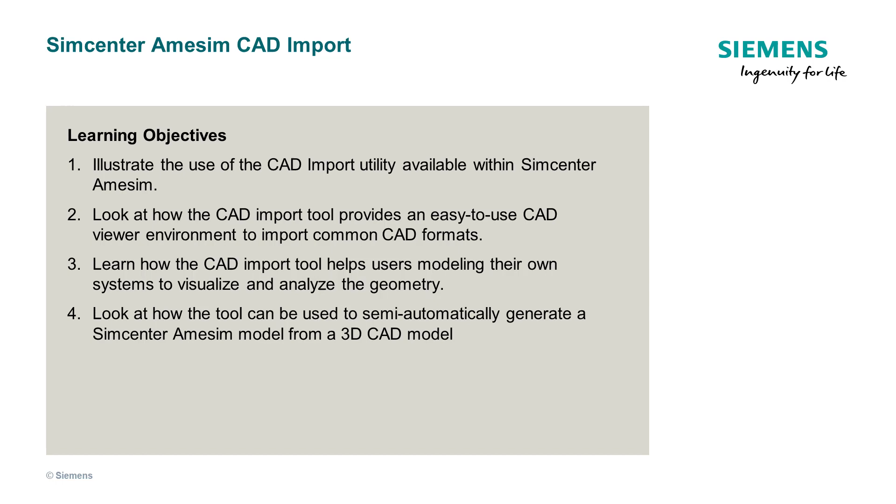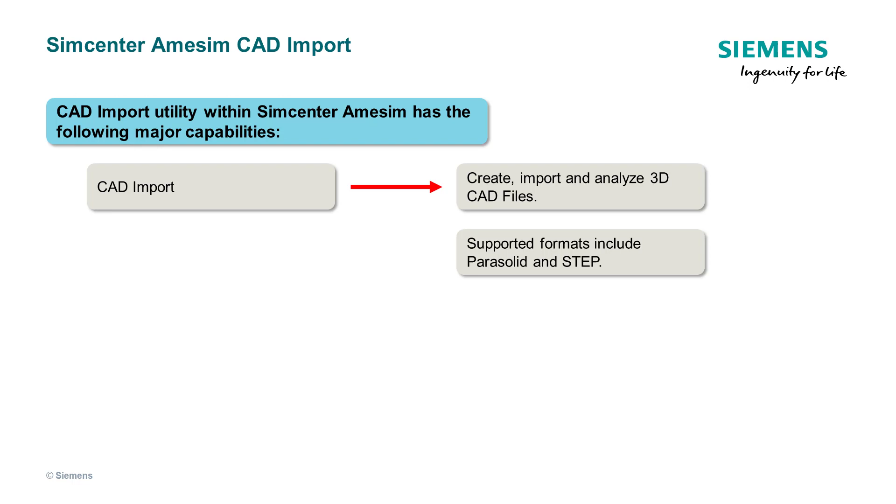We will also look at how the tool can be used to semi-automatically generate a Simcenter Amesim model from a 3D CAD model. The CAD import utility within Simcenter Amesim has the following major capabilities. First, CAD import. This is a Simcenter Amesim software integrated CAD viewer which you can use for creating, importing, and analyzing 3D CAD files without having to rely on the original CAD software application. The supported CAD formats for import include Parasolid and STEP files.

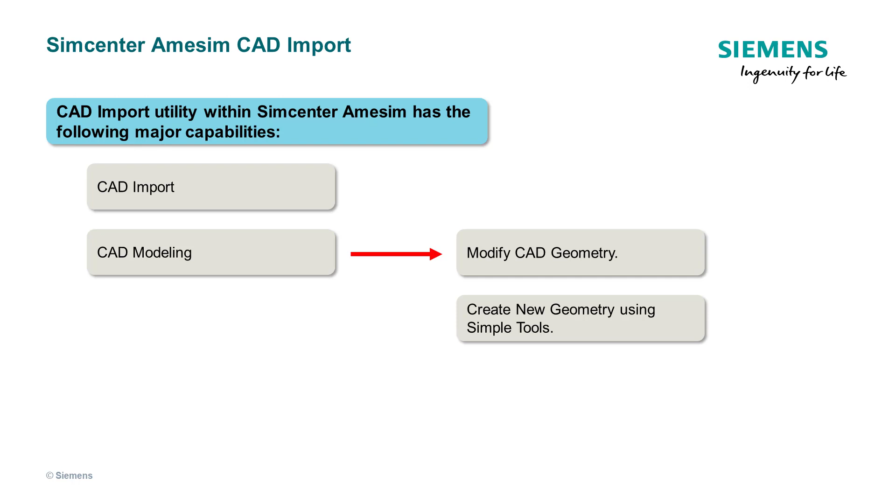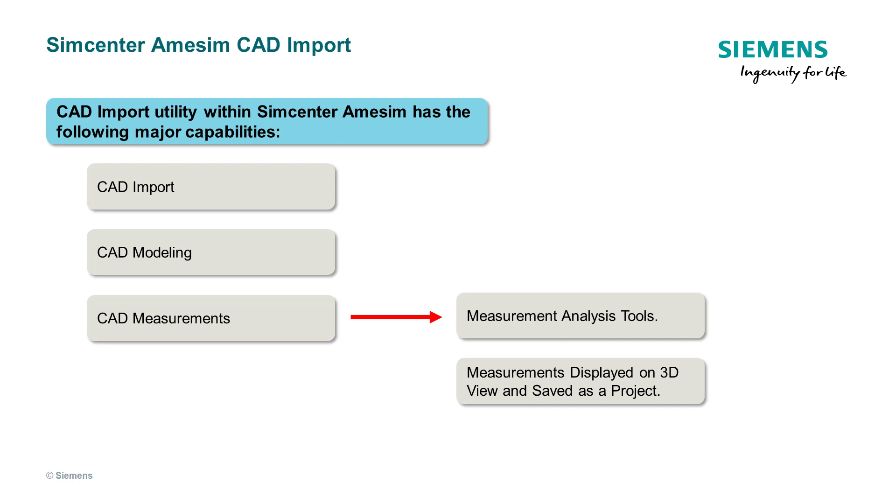Second, CAD modeling. The tool can be used for modifying geometry like filling holes, splitting bodies, etc. It is also possible to create new geometries using simple tools. A library of parametric shapes is included, and geometry can also be created from a sketch profile. Third, CAD measurements. CAD import also contains measurement analysis tools. All kinds of measurements can be displayed on the 3D view and saved as a CAD import project.

And lastly, 1D sketch generation. CAD import also provides advanced features that allow you to convert a 3D CAD model into a Simcenter Amesim 1D model. In a few steps, the 1D model is generated in the Simcenter Amesim environment and is ready to use for analysis.

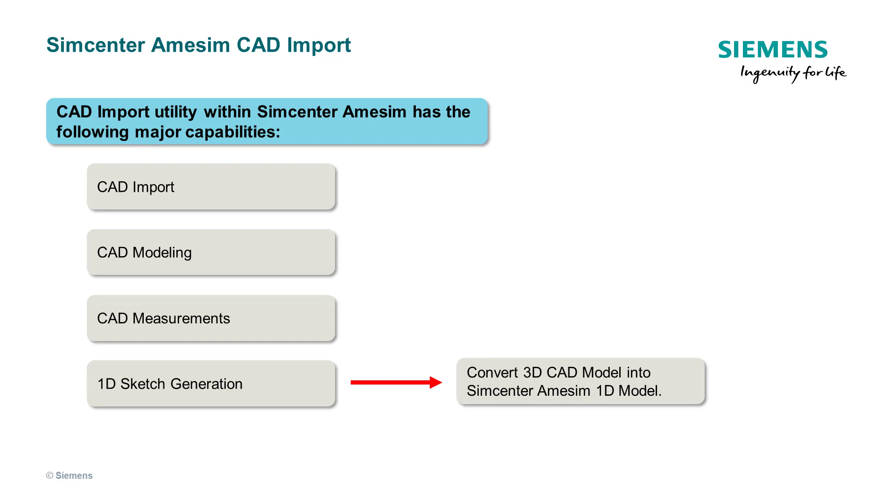Now, let's look at how to use the CAD import tool with the help of an example. We will go through each step one by one to generate a 1D sketch from a 3D CAD file. For this demonstration, we will use the 3D model of a pivoting vane pump. Before we launch the CAD import tool, we have to make sure that we have the necessary libraries loaded in the library tree. This step is important for the model to be generated. As we have a hydraulic lubrication system as an example, we will have the mechanical, hydraulic, and hydraulic component design libraries already loaded.

To launch the CAD import tool, go to Tools and select CAD import. A separate window for the tool will open. Let's quickly look at its layout. The CAD import environment has 4 panes. The object tree, which displays the structure of the object. The scene, which is the area where you visualize the 3D representation of the object.

The object inspector, which displays the properties of the selected object from the scene. It is possible to modify some properties of the object here. The measurement pane, which displays all the measurements that are performed. The type, the value, and the units of the measurement are also displayed here.

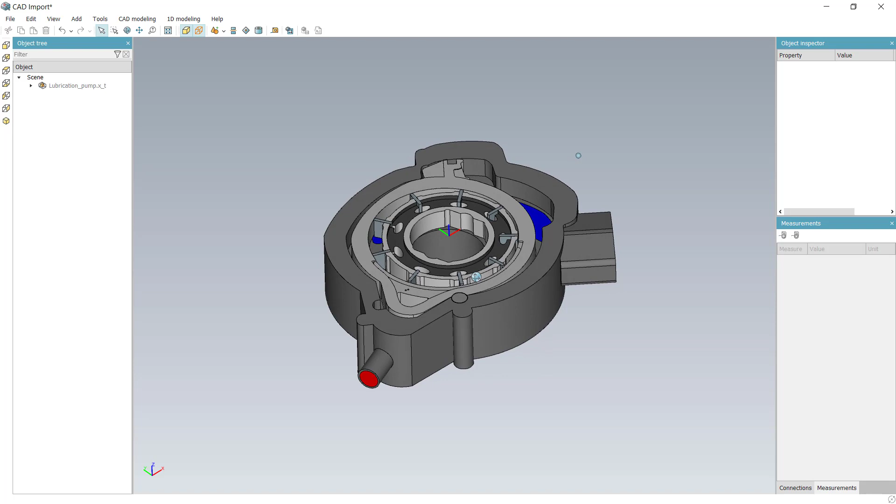To navigate the model, press the right mouse button and move the mouse to rotate the model. To pan, press the mouse wheel button and move the mouse. And to zoom in and out, scroll the mouse wheel up and down. Alternately, you can use the toolbar icons to 3D navigate the model as well.

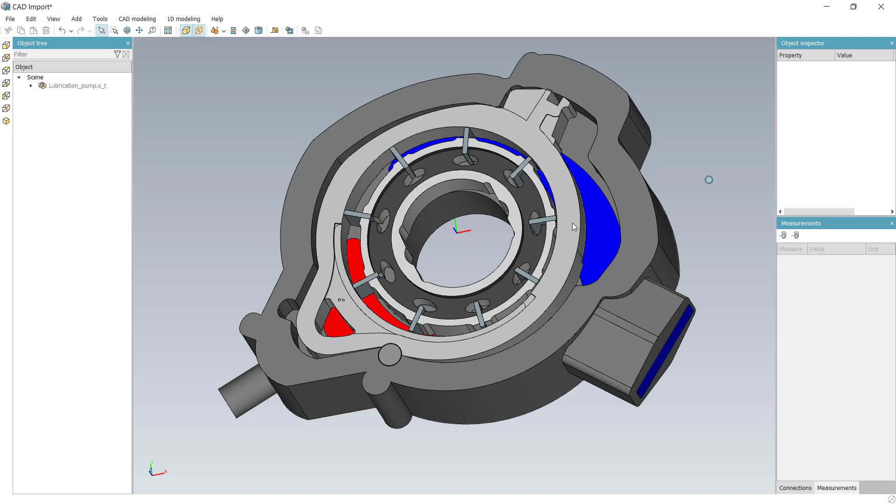As we will be creating a pivoting vane pump submodel, we will only need certain parts of the pump to create the submodel, such as the pump body, including the inlet and the outlet ports, the rotor, the stator ring, the pivot, and the vanes.

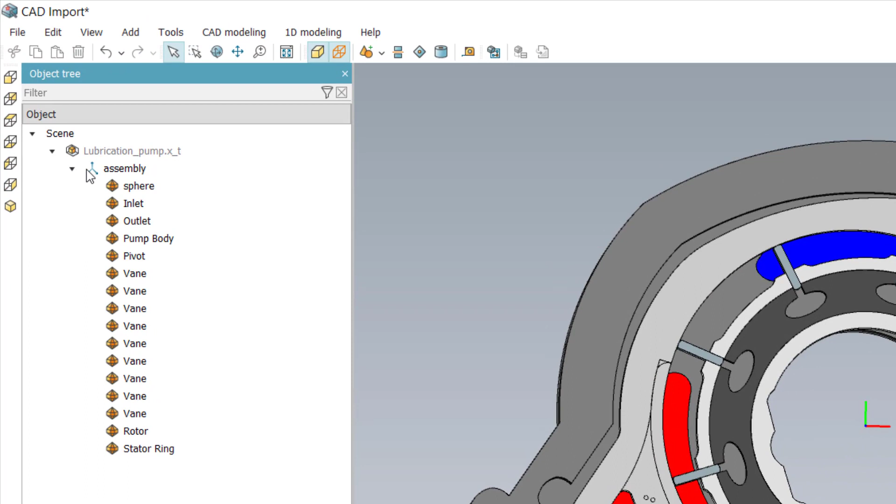The next step is to associate the pump assembly to a correct primitive in order to generate the correct pump submodel. To do so, select the Activate 1D Modeling option from the 1D modeling menu from the toolbar. Click the pencil icon next to the assembly frame in the object tree window. The primitive association window will open. Next, choose the type of pump technology required from the 5 choices. In our case, we select pivoting vane pump.

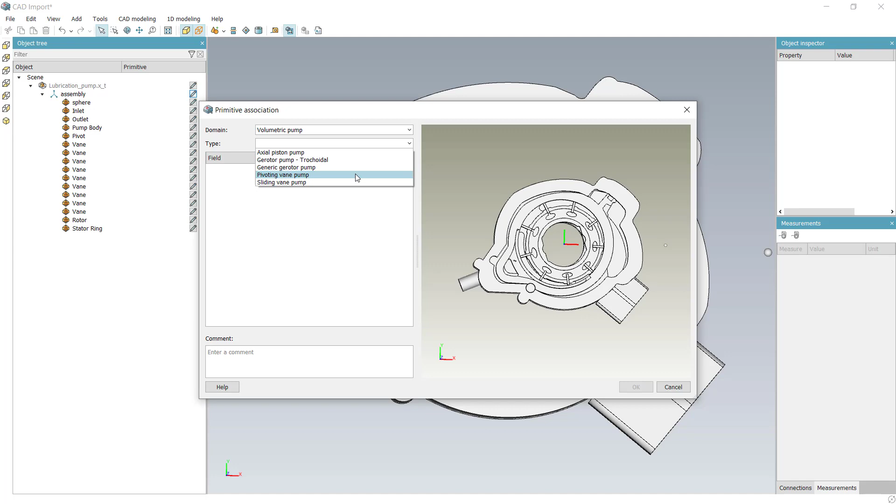A list of items appears below in which there are 3 categories. Ports, corresponding to the suction and delivery port selection. Parts, corresponding to the mechanical parts such as gears, rotors, stators, vanes, etc. And parameters, corresponding to the parameters related to the selected pump. The parameters are computed automatically when all the preceding categories have been correctly filled in. Only the ports and parts categories need to be filled in.

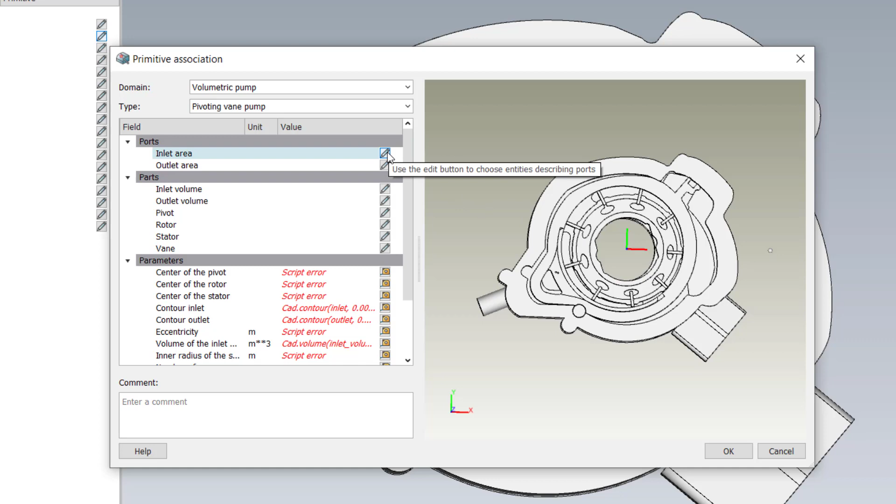To do so, click on the pencil icon next to each item to make the selection. For the inlet and outlet ports, select the visible face that intersects with the chamber volume. For the parts, select the body of each one separately.

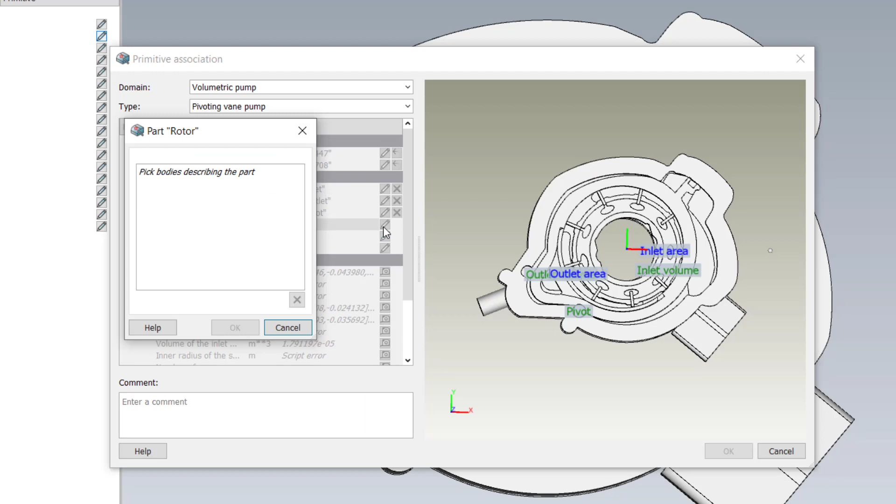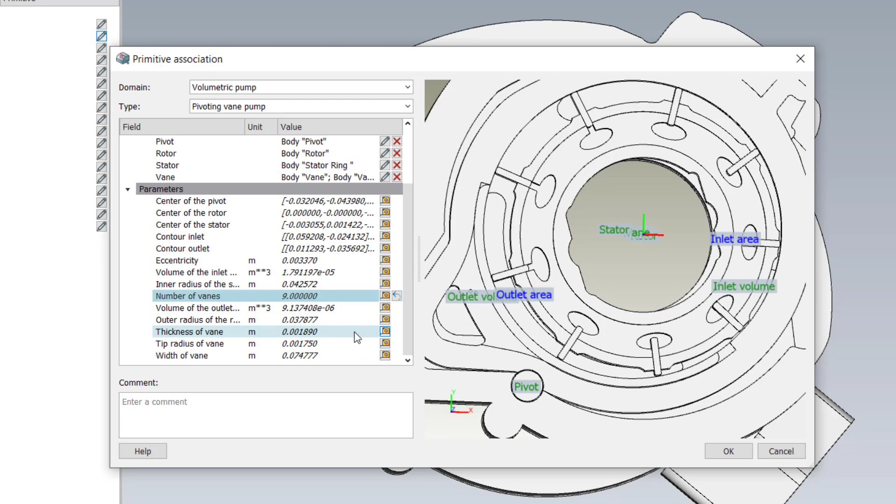Once all the ports and parts have been associated, all the parameters will be automatically calculated as seen, except for the number of vanes. This can be entered manually by double-clicking in the value column. We have a total of 9 vanes for this pump. Click on OK when complete.

The next step is to create the pump submodel using the 1D sketch generation option. Select Sketch Generation from the 1D modeling menu in the toolbar. A window will appear. Select the pre-configured option, Current Description, and then click Next. At this stage, you will be asked to save the model before going to the next step.

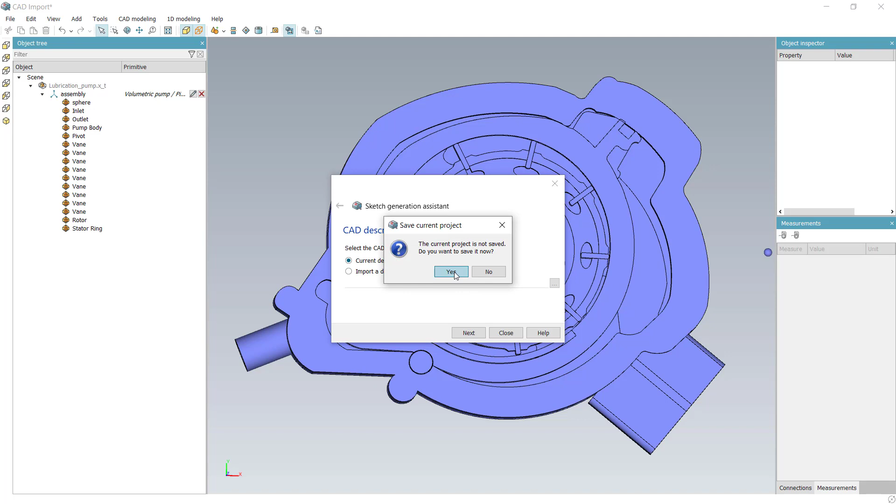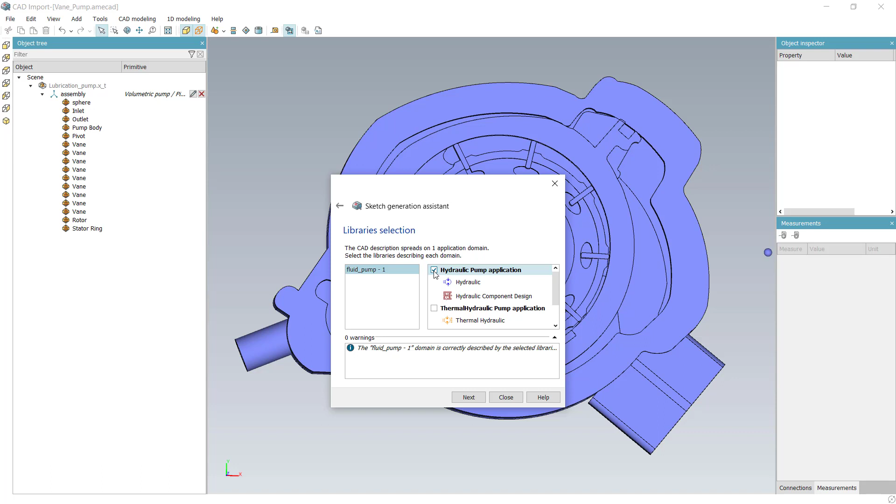Once the model is saved, in the next window, the categories used to model the pump and the fluid volumes are displayed. Tick the boxes that apply. In this case, we will select the hydraulic pump application. Click Next. In the next window, you will be asked if you want to clear the already existing SimCenter sketch. If not, uncheck the box and press Generate. The sketch will be generated.

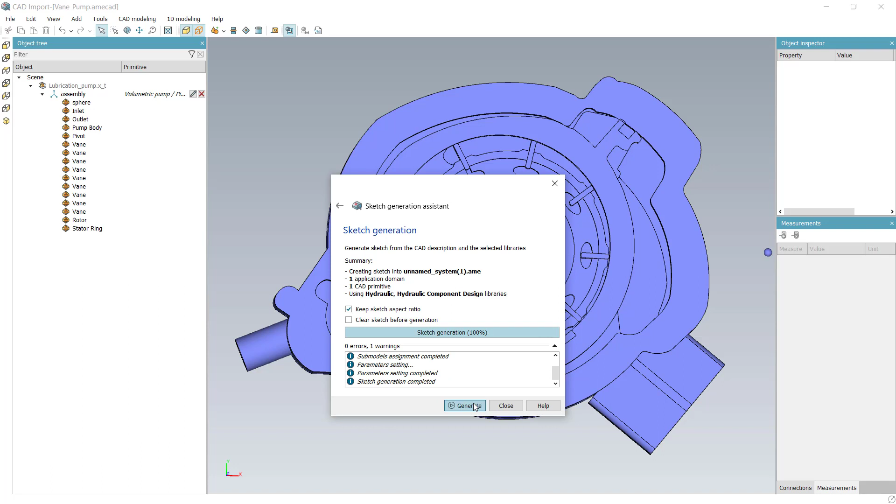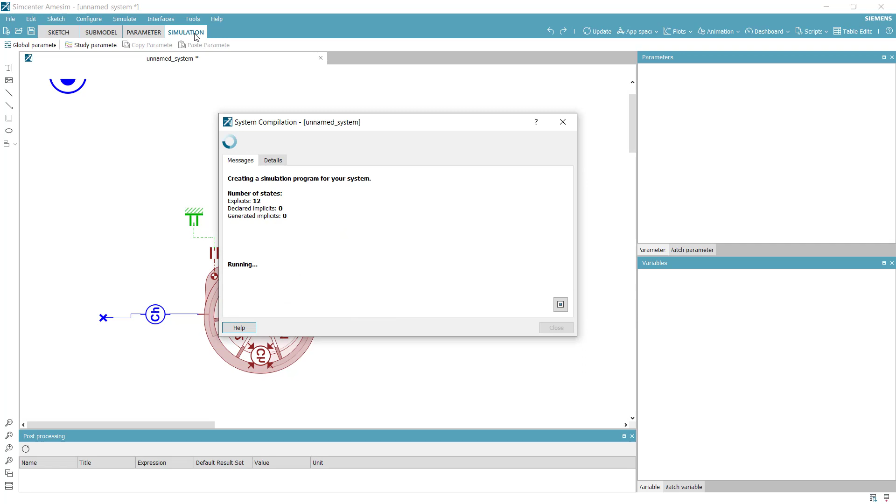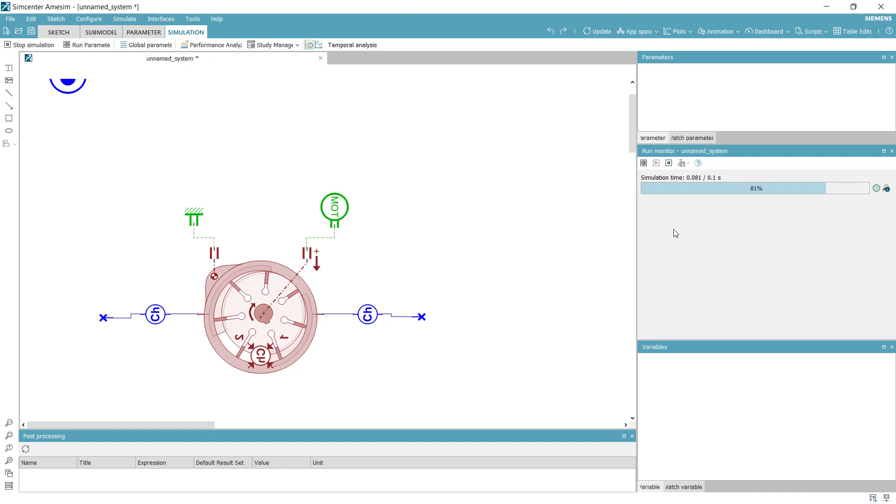In the parameter mode, you will notice that all the parameters are already assigned to the generated components. Switch to the simulation mode to compile the system and execute the simulation. You can change the simulation settings using the Run Parameter option. In the interest of time, let's run the simulation for 0.1 seconds and press Start. The results will be generated and can be plotted by dragging and dropping a variable in the sketch area.

This is how the CAD import tool can be used to easily import a 3D CAD file and convert it to a 1D sketch in Simcenter Amesim.